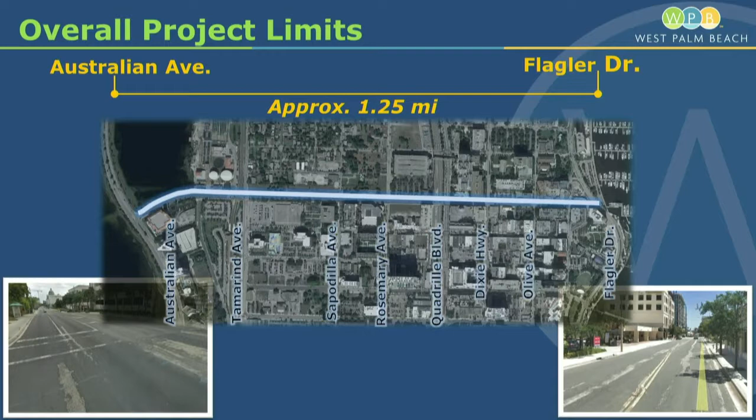Why so? Well, the road is basically in deplorable condition, as we can see - some pavement, some sections missing, things like that. So when we first tried to make this project happen, we looked at resurfacing, and then we saw the opportunity that we can also upgrade some of the features on that road. So we talked with the CRA, which is actually funding this project to make it become a reality.

When I mentioned that this project is based on safety, when we were looking at the design, we looked at the intersections - how to make it safe for all users: bikes, pedestrians, and automobiles. So we looked at that, and that's how we came up with our design.

Some of the safety features you will see on this project: we look at lighting - we will upgrade lighting throughout the corridor. ADA accessibility, to make it accessible for everyone. And also we'll have traffic calming. The lanes right now are 12 feet; the proposed plan is to reduce the lanes to 10 feet.

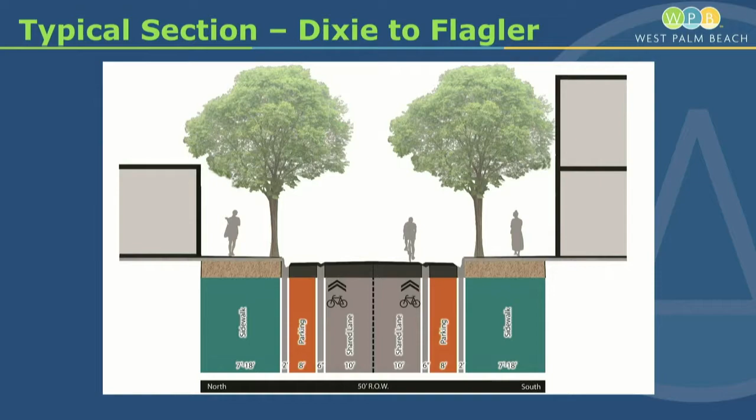Quick question from Madam President. Thank you, just a quick question. I just want to make sure I understood - currently, the lanes there on all of Banyan are 12 feet, or just in this section?

Mostly the 12-foot lanes are from Australian all the way to Dixie. Okay, and then east of that, I think it's about 12 foot as well, but we will be - and we're recommending 10 feet the whole entire way? Correct, yes. Yes, 10 feet from edge of pavement to edge of pavement, but as we designed this typical section, there are two things we're asked to look at.

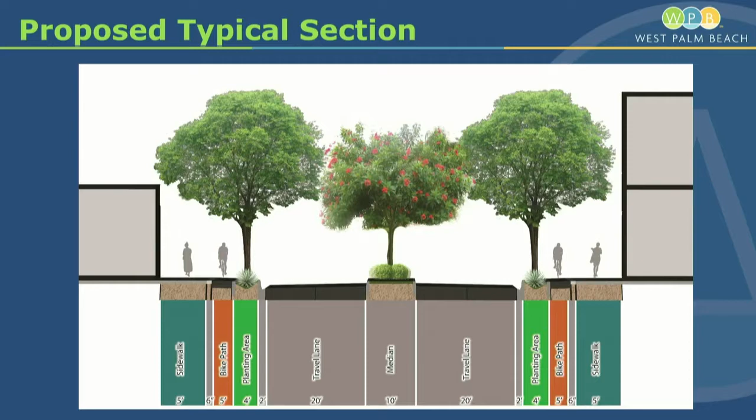One is to preserve capacity at the intersection - this is still a very important collector road for our city, so we want to make sure we have enough vehicle capacity. The other thing is like 20 feet, 2 10-foot lanes, but we're leveraging the outside gutter, so it's essentially 11 foot on the outside so that we could accommodate bus traffic along there. Great, thank you.

Good morning, Allison Justice. I just want to talk a little bit about the CRA's involvement in this project. As Vladimir mentioned, the city did have dollars in place for a road resurfacing project.

The CRA had been talking for a couple of years about the connections from the historic Northwest to downtown. Banyan is an important collector road, but it's kind of that visible boundary from downtown, and how do we make it so it's not such a boundary and it doesn't cut off the neighborhoods from each other? So when we started looking at this project, the CRA was interested in those connections.

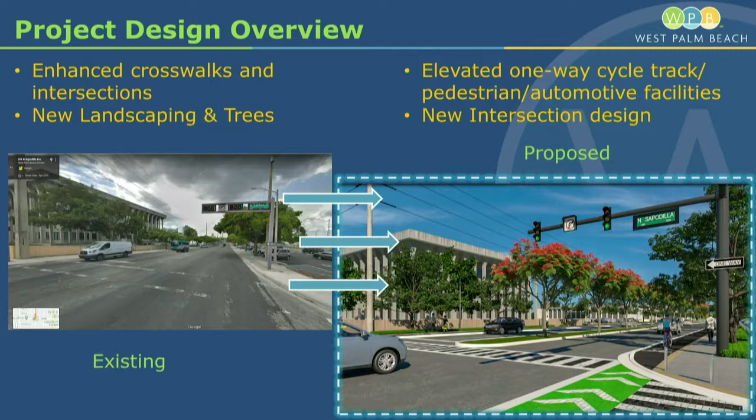Rosemary is an important intersection coming from the historic Northwest, also making it easy to cross. Having the median is helpful to give people refuge. The design overview has additional trees. Obviously, shade is important in the city. Lighting, the cycle track — the cycle track was part of the bicycle master plan that the city implemented, as well as the mobility study. So this is not just a mobility project, it's safety, it's mobility, it's a bike project as well. It covers all of those items.

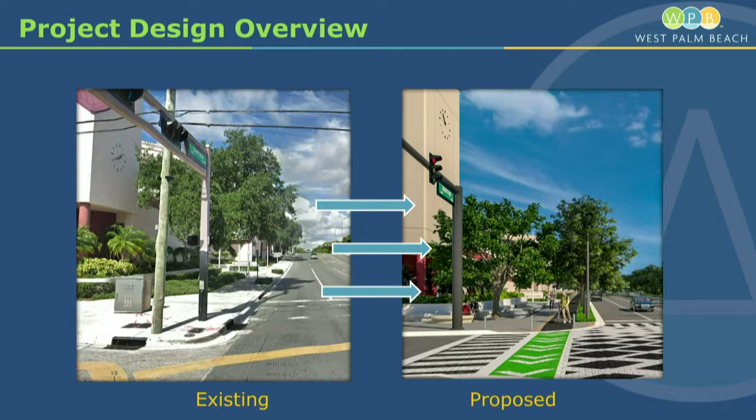So I think now we just have a few of the photos. The intersections will be paver intersections. We do have the cycle track again, with painted or colored pavers across the intersection to give a distinct crossing for pedestrians and bicyclists. This is the intersection potentially at Rosemary, which will have an entire design of its own, again, to enhance that intersection, letting the vehicles know this is a place where you should be slowing down and paying attention.

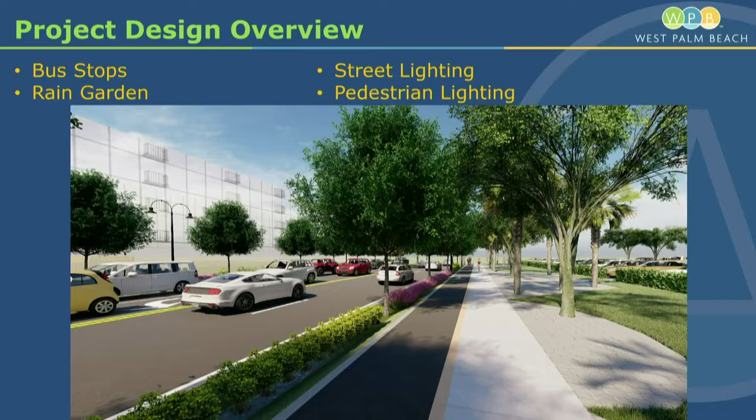Again, these are some of the design features. We are maintaining the bus stops, working with Palm Tran on where potential future shelters will go. Also, to help with drainage, a rain garden is going to be placed on the outside, on the curb line in certain areas, to help with some of the drainage challenges along Banyan.

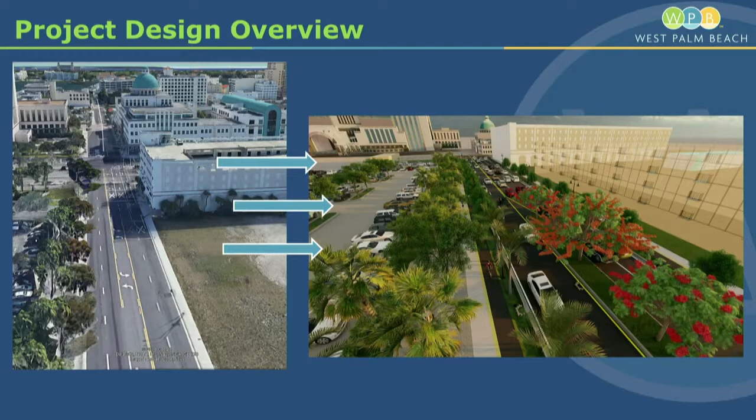And again, here's just some overviews, some renderings of what it will potentially look like. That's the intersection of Tamarind and Banyan. There's a couple things to note.

We are preserving the black olive trees that are on Banyan, mainly between Sapodilla and Tamarind, on the outside of the sidewalk. So the typical section will be a little bit different, because we like to put the trees towards the road — it helps protect the pedestrians and it helps slow the traffic as well. On here, they will be at the backs of the curbs. There is shade already there and we do want to maintain what we have. So some of the typical sections will look a little bit different as we go from Tamarind to Sapodilla and then from Sapodilla on.

One thing to mention about the trees is that we are installing soil cells so that as the tree grows, they have space, and it won't uplift our sidewalk like we currently face.

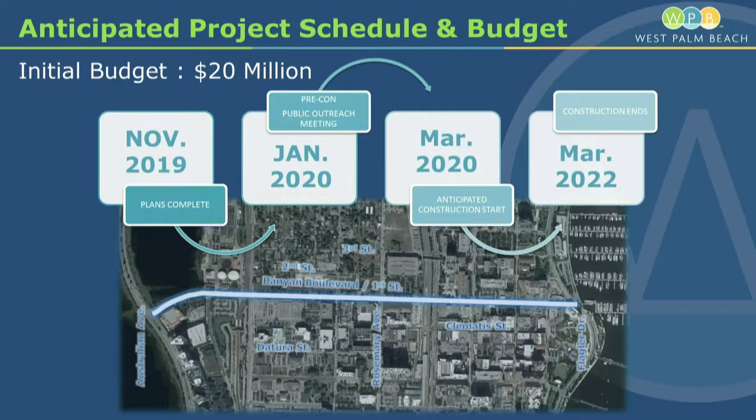This is our anticipated schedule and budget. Our initial budget for this project from Whiting Turner came in at 20 million. We are planning to have the plans completed by the end of next month. Before we start construction in January, we'll have another public outreach meeting — a pre-construction meeting for all the merchants and stakeholders of this project. We intend to start construction in March 2020, and right now we have a 2-year schedule, so we anticipate completion by March 2022.

So it's a $20 million project. What's the source of the funding? That is from the bond project. From the CRA, we currently have 15.5 million.

About 3 years ago, just to add to that, this project originated as purely a resurfacing project out of the $40 million bond. So 1.1 million out of that bond was dedicated towards this project. Obviously we've already spent up to that amount in design fees, excavations, and exploration as part of this project. So it's going to be joint funding, and we're looking towards the CRA bond to make this project whole.

Okay, any questions, commissioners?

Very good. I would say we look forward to Banyan being closed, but we don't look forward to... yeah, this is going to be interesting. Thank you so much. Thank you.